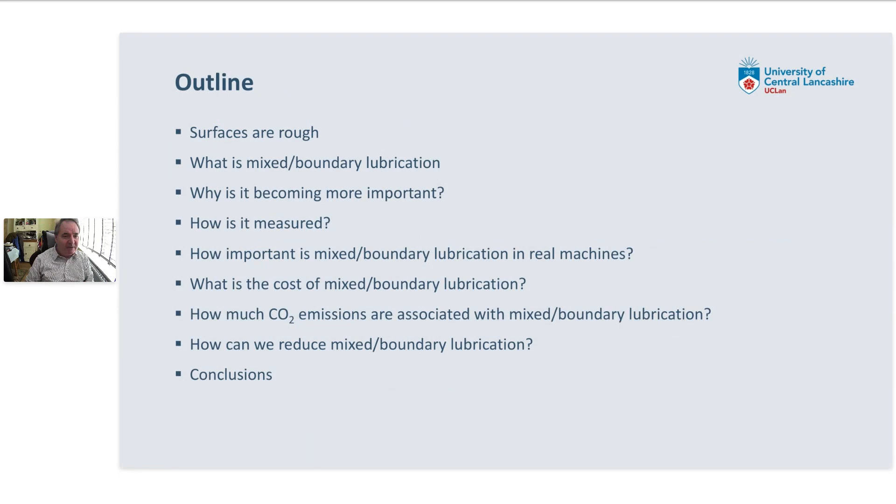I'll explain why mixed and boundary lubrication is becoming more important, and then I'll talk about how mixed and boundary lubrication can be measured in the laboratory and how it can also be measured in real machines. Then I will talk about how much mixed boundary lubrication actually costs, and where the costs come from. In addition, I'll talk about how much CO2 emissions are associated with mixed and boundary lubrication. And then I'll talk briefly about how we can reduce mixed and boundary lubrication in the future.

So this is basic tribology, so hopefully many of you on the call will be familiar with this. But at the micron scale, surfaces are rough. So if we have a parabolic slider moving against a flat surface as shown below, if we scale the vertical axis by about a factor of 1,000, we will see that the surfaces aren't smooth.

So the centerline average of the parabolic slider is shown by the dashed black curve. But in fact, the actual surface will oscillate around that centerline average. And depending on how the component has been manufactured, there will be a probability distribution function associated with that roughness.

And you can define a root mean square roughness of the surface, which we call sigma 1 here, and similarly for the flat surface there's a sigma 2. And if we compare the film thickness to the square root of sigma 1 squared plus sigma 2 squared, we can define something called the lambda ratio, which effectively tells you how far apart the rough surfaces are separated.

And you need a lambda value of about 3 or more to completely separate the rough surfaces. And if the lambda value is less than that, then you will start getting the rough surfaces interfering with each other and touching each other, and you'll get wear and friction occurring.

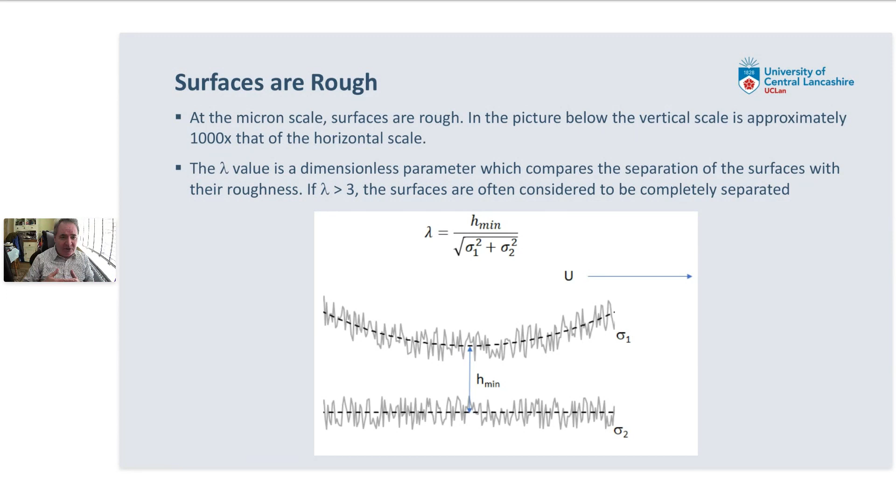So what this means is if we measure the friction coefficient, it will depend to a great extent on how thick the film is between the moving surfaces. The figure below shows what happens as we change the lambda ratio when two surfaces are sliding against each other.

When lambda is less than 1, effectively none of the load is carried by the fluid. All of the load is carried by the rough surfaces, and you end up with a friction coefficient which tends to be a fixed value of about between 0.1 and 0.2 typically.

Then as the lambda ratio increases, as we increase the film thickness, we'll start getting some of the load carried by the fluid and some by the asperities. Because some of the load is carried by the fluid, the friction coefficient drops from its value in the boundary regime, and it will drop and drop until the amount carried by the fluid is 100% and there's none carried by the asperities.

So on the right hand side of this figure, the fluid is thick enough to completely separate the rough surfaces, and the friction is entirely determined by the properties of the fluid, things like viscosity. If we carry on increasing lambda, making the film thicker and thicker, the friction actually goes up because you've got to overcome all the friction of carrying this big thick fluid film.

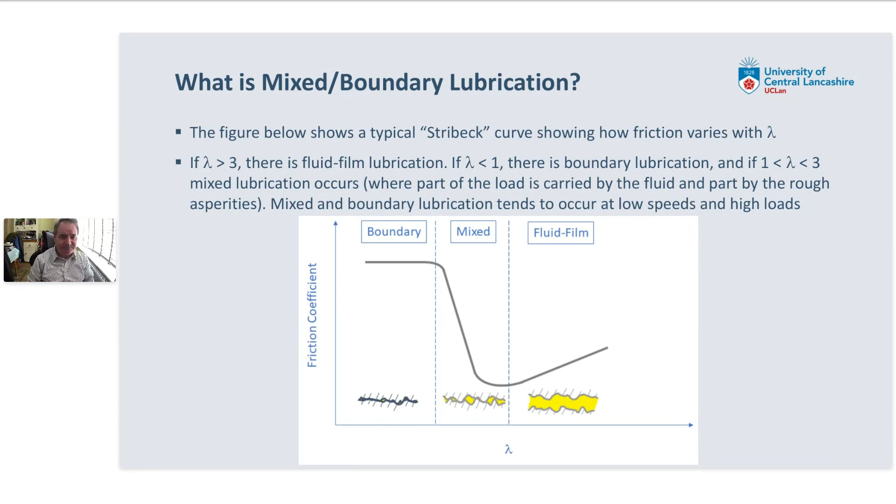One reason why mixed and boundary lubrication is becoming more important is because there's an increase in interest in making machines more efficient. And one way of doing that is to use lower viscosity lubricants.

This table shows how the viscosity of passenger car lubricants has changed since about 1990. Back then, a lot of people were using SAE 15W40 grades in their engines, with viscosities as shown: about 114 centistokes at 40 degrees C, about 15 centistokes at 100 degrees C, and a high temperature, high shear viscosity, measured at 150 degrees C and a shear rate of 10 to the 6, of about 3.5. That was the situation in 1990.

If we go to the present day, a lot of people are using 0W20 grade lubricants in their cars nowadays, and the viscosity has effectively halved at 40 degrees centigrade, has come down by about a third at 100 degrees centigrade, and has come down substantially at the high temperature, high shear viscosity.

The reason people have been using lower viscosity lubricants is because engines are primarily lubricated hydrodynamically. So if we reduce the viscosity of the fluid, we should reduce the friction in the engine and improve the fuel consumption. And that indeed is the case.

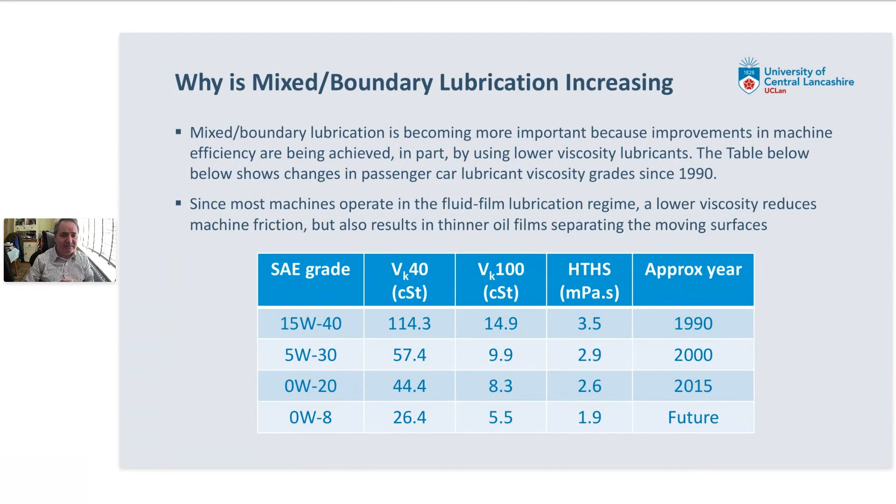So how can we measure mixed and boundary friction in the laboratory? We typically use tribometers of various types. An example shown here is a mini traction machine.

This is effectively like a pin on disc machine, but instead of a pin, it uses a ball, and the ball can rotate or be fixed to slide. This machine is filled with oil, and we're measuring the friction between the ball and the disc.

The reason there's quite a lot of interest in this machine is that the disc speed can vary from just a few millimeters per second to a few thousand millimeters per second. So the wide range of disc speed means you can go from boundary friction right through mixed friction almost to hydrodynamic, depending on the temperature of the oil.

What we can do is change the ball and the disc for each test. The disc and ball are usually quite smooth, with surface roughness of about a few nanometers, 5 nanometers for the typical samples used here. And we can simply test different lubricants to see what the effect of changing the lubricant is on the friction coefficient.

And so we've got some typical results shown here for a 10W40 engine lubricant. This lubricant is the blue line in this graph. This particular lubricant will have quite a lot of anti-wear additive in, and that tends to give you quite a high friction coefficient of about 0.12, and it stays high up until about 100 or 200 millimeters per second.

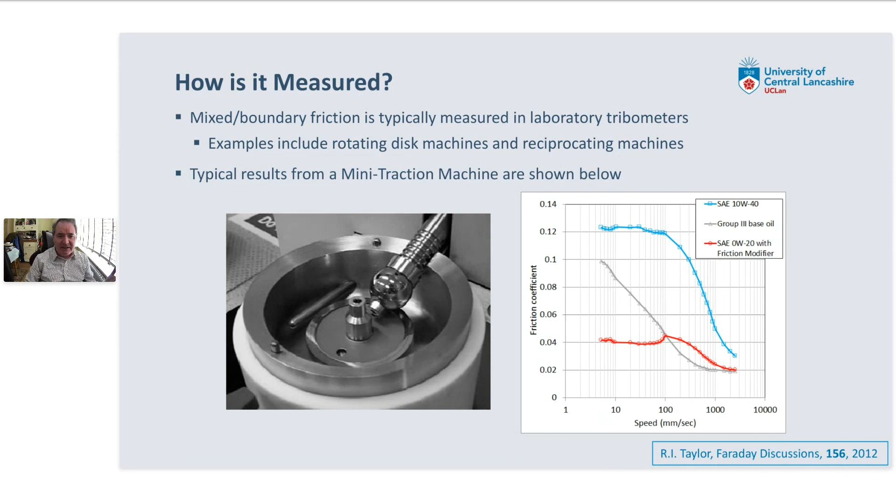And then the mixed regime doesn't seem quite as important because it's squished on this graph due to the nonlinear logarithmic scale that we used.

So as tribologists, we do need to consider how results are presented and what perception those results give you by looking at the different ways they're presented. Although it's useful to plot on a logarithmic scale because you can get the wide speed range on that scale, it does sometimes give you the impression boundary friction is much more important than it actually is.

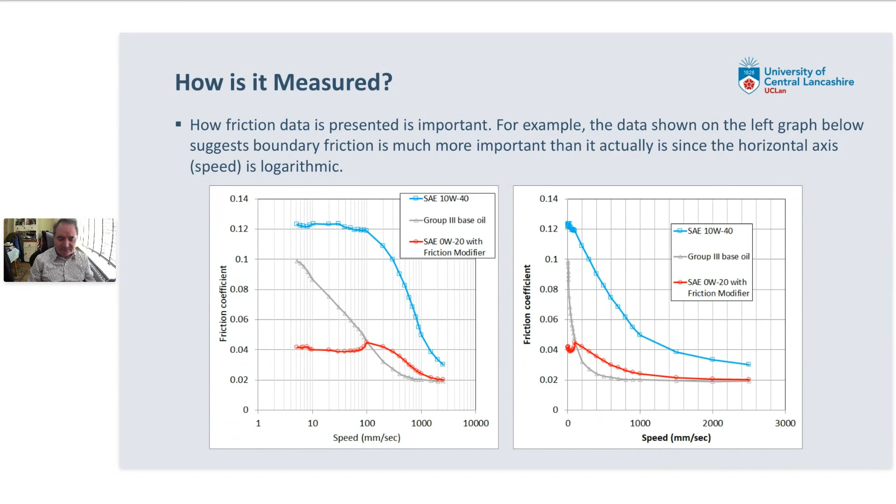Now, the mini traction machine has also been used recently by the Imperial College tribology group, and they did some interesting experiments where they tested a wide range of lubricants in the mini traction machine, and they subtracted the fluid film friction, and they normalized the data so that the boundary friction was normalized to 1. Crucially, they plotted the data not against speed, as is usually done in the mini traction machine, but against the lambda ratio.

And they actually found that you could find a common curve for a lot of the lubricants that were tested. I should say none of these lubricants had friction modifiers in, but this work suggested that you could come up with fairly simple equations to predict the proportion of mixed and boundary friction, which in this case we called X, as a function of the lambda ratio.

In fact, some work I did with co-workers at the University of Central Lancashire, we compared this fit to commonly used mixed and boundary friction models, things such as the Greenwood Tripp model. We actually found that the Greenwood and Tripp model under-predicted the mixed and boundary friction proportion compared to the experimental data from Imperial College and this curve fit.

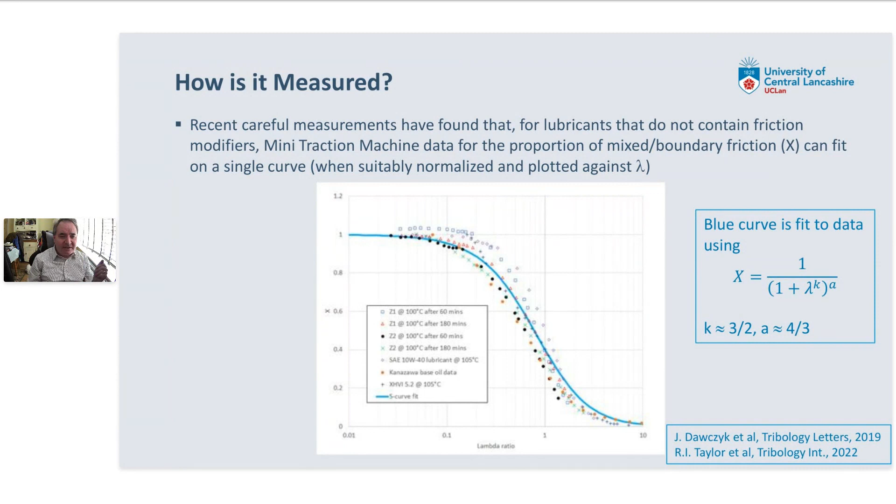So this is all measuring mixed and boundary friction in the lab. What about in real machines? This is some data from passenger car engines. For passenger cars, there are lots of groups around the world that have directly measured the friction loss of engines.

Typical data is shown on the left-hand curve, where this is a motored test. So the engine is not firing as it usually does. You're simply running the engine via an electric motor and measuring the friction loss of the bearings and the piston and the valve train.

What you tend to find is the friction goes up with engine speed, and for speeds greater than about 1500 RPM, the friction simply goes up with speed. When friction goes up with speed, that's usually an indication you're in the hydrodynamic or fluid film lubrication regime. But if the speed is less than about 1000 RPM in this particular case, we see the friction starts to go up again at low speeds.

This is an example where you've got mixed and boundary friction. In the reference quoted here, the friction of this engine was split between fluid film components and the mixed and boundary components. We can see that mixed and boundary friction actually becomes greater than fluid film friction for speeds less than about 1200 RPM. This was with a fairly old 1990s 2-litre gasoline engine, fully warmed up, with a sump temperature of about 93 degrees centigrade. So we can see a considerable amount of mixed and boundary friction at low speed in this engine.

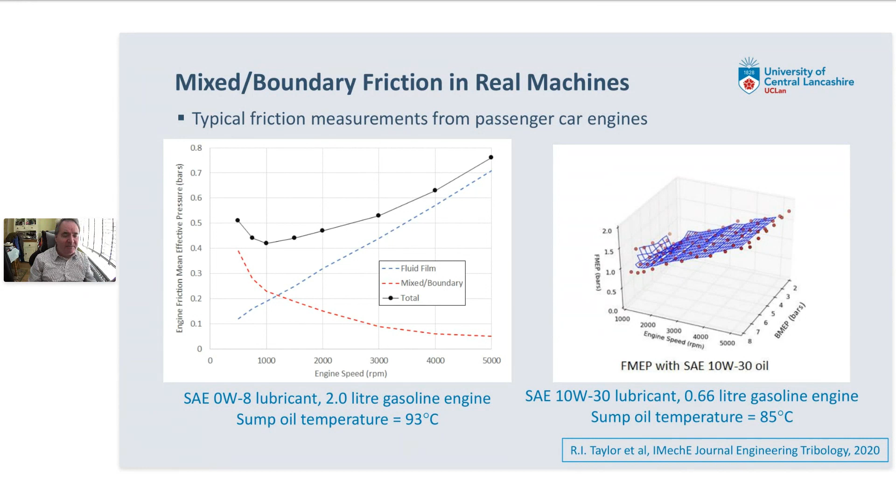Now, this simple graph hides the fact that each component really has its own Stribeck curve. This is the same data plotted again, but in terms of the different component contributions. The blue line shows how the valve train friction varies with speed, and it keeps going down with speed - so over the whole speed range of this test, the valve train is in the mixed and boundary friction regime. Contrast that with the red line, the journal bearings, where friction simply goes up with speed over the whole range, suggesting the bearings are completely in the hydrodynamic fluid film regime. Then you've got the piston assembly, the green line, predominantly in fluid film lubrication above about 1000 RPM, but at lower speeds we see some mixed and boundary friction too. The timing chain is a bit complicated, but it's a fairly small contributor to engine friction.

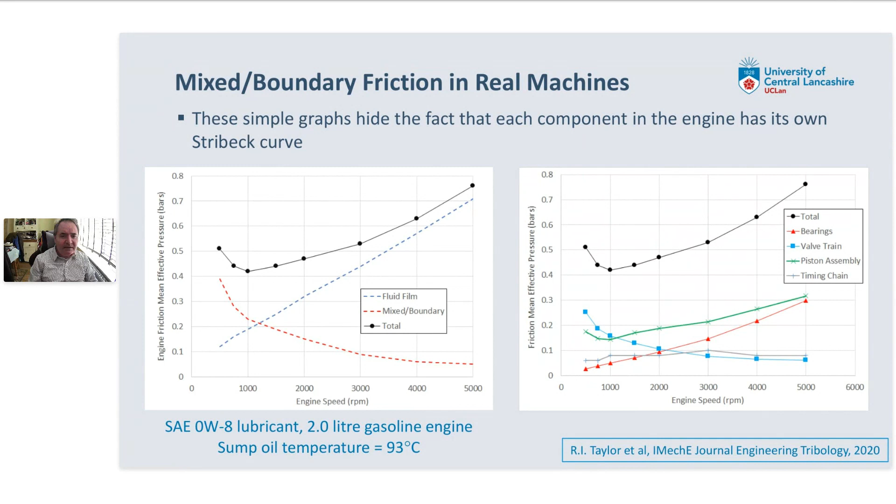The other thing about real machines is a process called running in, which is quite important for friction. When you've got two brand new components, the rough surfaces, when they first touch, the highest asperities will tend to contact first. They will plastically deform, and you'll get wear occurring. Over the next tens or hundreds of hours, the surfaces will actually modify themselves, and you'll usually find that the surface roughness of the new component is reduced after running in occurs, and that the friction of the new machine or engine will be higher than when it's fully run in.

This graph shows some data from a paper from 1996, where they directly measured the friction force in a piston assembly for a brand new piston ring and a run-in piston ring. We can see that for the new piston ring, there are quite large spikes occurring when the piston speed is 0. But once it's run in, there's substantially less mixed and boundary friction because of the lower surface roughness.

Also the component can actually change shape - this occurs for piston rings. The shape can change, which can subtly alter the film thickness in the piston ring and actually give you thicker films. So you can end up with a worn ring giving you thicker films and having lower roughness, so you get a double effect on the lambda ratio. For a new piston ring, the lambda ratio could be maybe 1, but after it's run in, it could be 3 or 4 - so you can move from mixed and boundary through to fluid film.

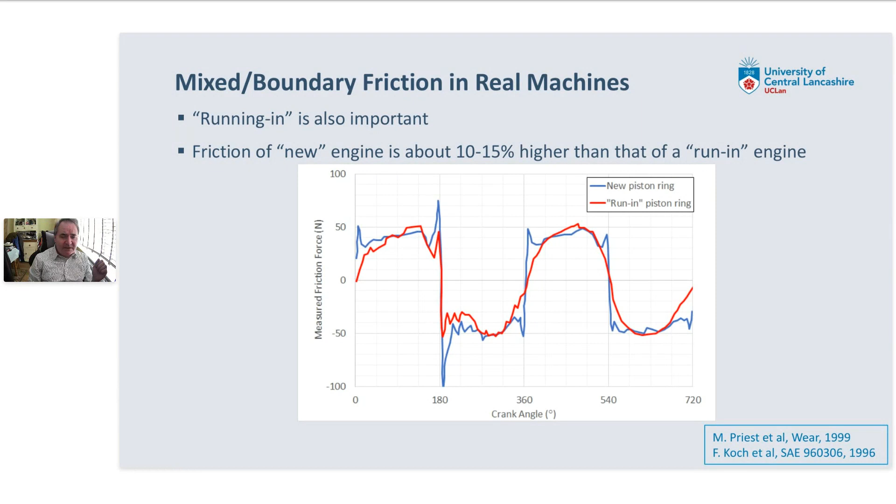So that's showing what happens in real machines. Now, what about the costs of mixed and boundary friction? There are really 3 components to how much mixed and boundary friction will cost someone. First of all, you've got friction occurring, and you have to supply fuel or energy to overcome that friction. So part of the cost is simply the energy used - the price you pay for the fuel that is used to overcome mixed and boundary friction.

Secondly, mixed and boundary friction can cause wear, so you can end up with parts wearing out and needing replacement. You'll have to take the part out and put a new one in, with the cost of making the new part, getting it to where it's needed, and fitting it. Thirdly, in some situations in factories, a key machine could fail, and the whole factory has to close down. You're still paying workers, and there are lots of costs associated with unexpected breakdowns. So that's the main areas where costs occur.

Now, in terms of passenger cars, under fuel economy tests, a lot of work has gone into trying to work out how much fuel is used to overcome engine friction. Typically, because fuel economy tests are done under low load, roughly 20% of the fuel used in the vehicle is used to overcome engine friction.

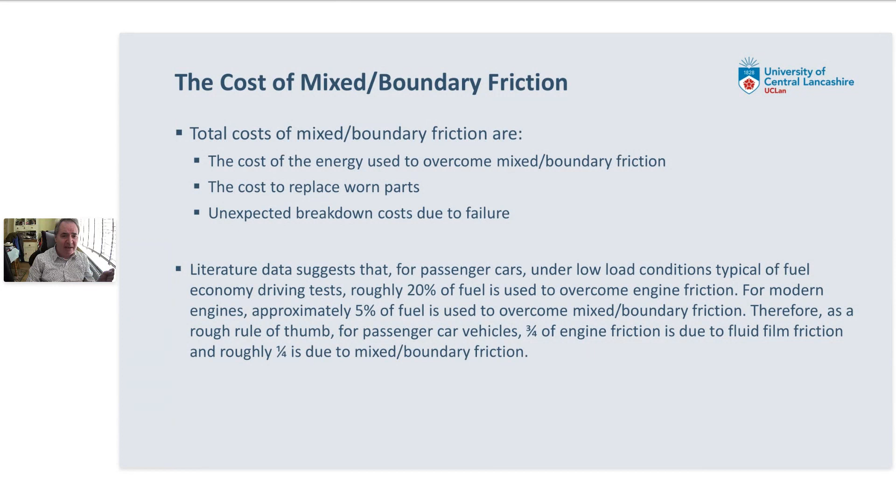In a typical car used in the UK, people will typically use 1,000 litres of fuel a year. So if 5% of that is used to overcome mixed and boundary friction, that's about 50 litres of fuel per year per car. In the UK, there's about 30 million passenger cars, so we can multiply these numbers up and end up with quite large figures. Just for the UK, there's about 1.5 billion litres of fuel used to overcome mixed and boundary friction, and that costs, at about £1.50 a litre.

In addition, there's the cost of making the fuel and the CO2 emissions associated with burning and making it, about 3 kilograms of CO2 emitted for each litre burnt. So we can work out the numbers for the UK and extrapolate to the worldwide car population. In the UK there's 30 million cars, worldwide there's about a billion cars. If we multiply these numbers up worldwide, about 50 billion litres of fuel are used to overcome mixed and boundary friction, at a cost of about $100 billion, with CO2 emissions of about 155 million tonnes. These are large figures.

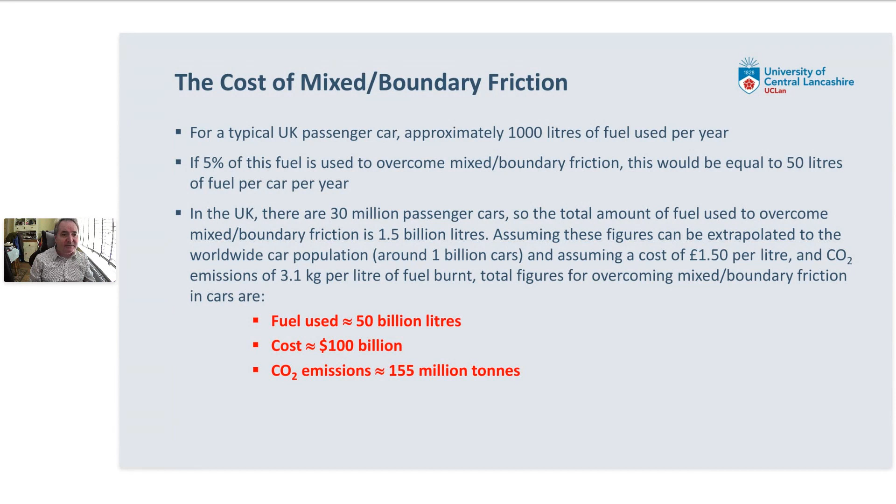This is because as you scale an engine up from, say, a small 1-litre gasoline engine to a 10-litre diesel engine, the hydrodynamic parts become more important compared to the valve train, which is mainly the component with most mixed and boundary friction. In addition, if you scale the valve train up, it actually becomes easier to lubricate, and with a larger engine you have space to put rolling elements into the valve train, whereas in a small gasoline engine it's usually sliding elements.

So what happens in a large diesel engine is it's much more hydrodynamic than a small gasoline engine. At the same time, heavy-duty diesel engines are used in trucks which are quite heavily loaded, and when a vehicle is heavily loaded, the proportion of fuel used to overcome friction decreases. So you've got two effects happening in a heavy-duty truck: less fuel is needed to overcome friction. Whereas in a gasoline engine we said 20% of fuel was needed to overcome engine friction, in a heavy-duty truck it's more like 10%.

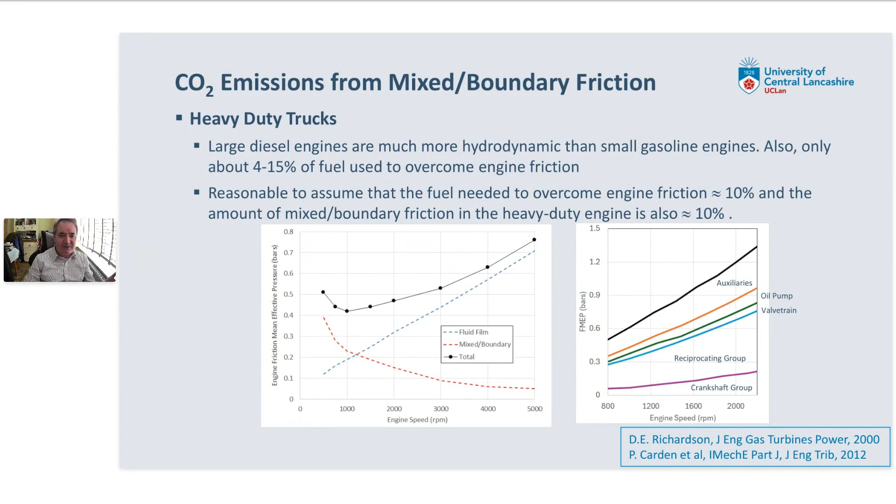So although only 1% of fuel is needed to overcome mixed and boundary friction in a heavy-duty truck, this is counterbalanced by the fact that fuel consumption of heavy-duty trucks is much larger than passenger cars. There are two effects going on: first, the fuel consumption of the truck is a lot larger, about 30 litres per 100 kilometres compared to 6 or 7 for a passenger car. Secondly, the annual mileage of a truck is about 10 times larger than that of a car.

For a typical truck, the annual fuel consumption is about 30,000 litres compared to 1,000 litres for passenger cars. When we combine all these figures, we find that roughly 300 litres of fuel per year is used to overcome mixed and boundary friction, at a cost of about £450 and CO2 emissions of almost 1,000 kilograms. Worldwide, there are about 300 million heavy-duty trucks. When you do the sums, the figure for a heavy-duty truck for overcoming mixed and boundary friction, in terms of fuel, finance, and CO2 emissions, is actually higher than the numbers coming from passenger cars, even though the amount of mixed and boundary friction is actually lower in the heavy-duty truck.

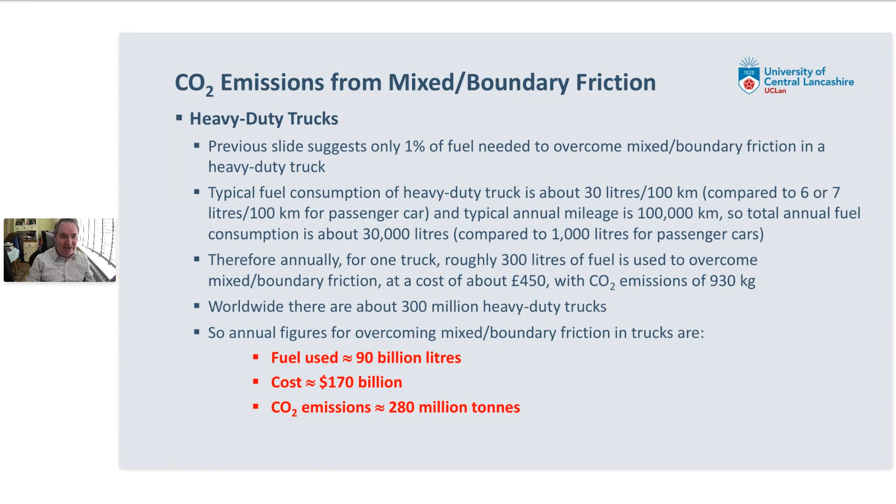We've seen there are some very large numbers here on how much fuel is used to overcome mixed and boundary friction, what that means financially, and how much CO2 emissions there are. So there's a lot of interest in the tribology community in how to reduce mixed and boundary friction, and there are really three main approaches. First, we could try and reduce the friction coefficient between the moving surfaces.

We can use friction modifier additives in lubricants. We could look at using alternative materials, such as ceramics and DLC. And there's a lot of research going on in tribology labs looking at super lubricity - can we make changes to the surfaces so that you almost get an order of magnitude reduction in friction coefficient by making the surfaces super lubricious?

The second thing you can do is try and alter the surface roughness profile. You could super finish components and reduce the surface roughness, but this obviously adds expense to the finished component. The other thing you could do is put deliberate surface texturing onto components to increase the load-bearing capacity of the surfaces and actually increase the film thickness.

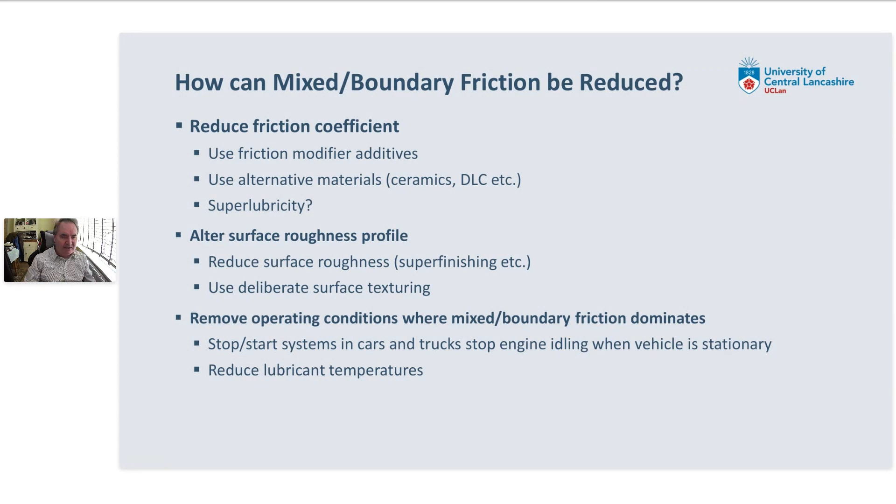The third thing you could do is try and reduce the operating conditions where mixed and boundary friction dominates. For example, in cars and trucks, you get most mixed and boundary friction occurring when the engine idles. So if you have a stop-start system where the engine stops when the vehicle is stationary, you effectively remove those operating conditions and reduce the amount of mixed and boundary friction. The other thing you could do is reduce lubricant temperatures, which will increase the viscosity of the fluid and increase the film thickness.

I've just about finished, hopefully just about on time. Hopefully I've convinced you that mixed and boundary friction is becoming more important because lubricant viscosity is going down. In addition, power densities of machines are going up, lubricant temperatures tend to be increasing, and sump volumes are decreasing.

We've done some detailed calculations for passenger cars and trucks and found that for passenger cars, about 5% of the total fuel used, and 1% of the total fuel used in a heavy-duty truck, are used to overcome mixed and boundary friction. These costs - just the energy costs, I've not talked about the cost due to wear or replacement parts - amount to enormous figures. For passenger cars and heavy-duty trucks, we've estimated about 150 billion litres of fuel are used to overcome mixed and boundary friction, at a cost approaching $300 billion, with CO2 emissions of almost 500 million tonnes.

These are very, very large figures, and it focuses the mind of the tribology community that the need to reduce mixed and boundary friction, as well as being good in terms of reducing friction and making machines more energy efficient, will have a massive impact on the amount of fuel used, cost to the customer, and CO2 emissions. Research on reducing mixed and boundary friction, including topics such as super lubricity, are going to be very important in the future for both customers and the environment.

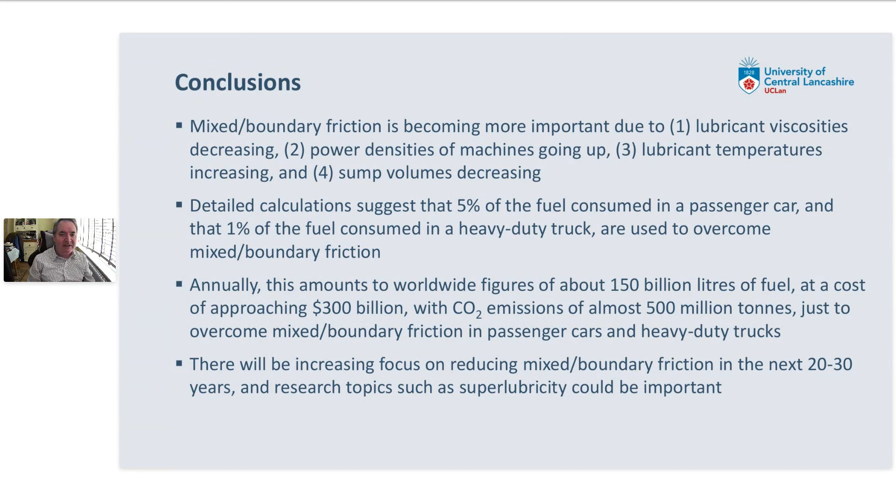So thank you for listening, and I'm happy to answer any questions, which I think will be after Ben's talk. So thank you very much.

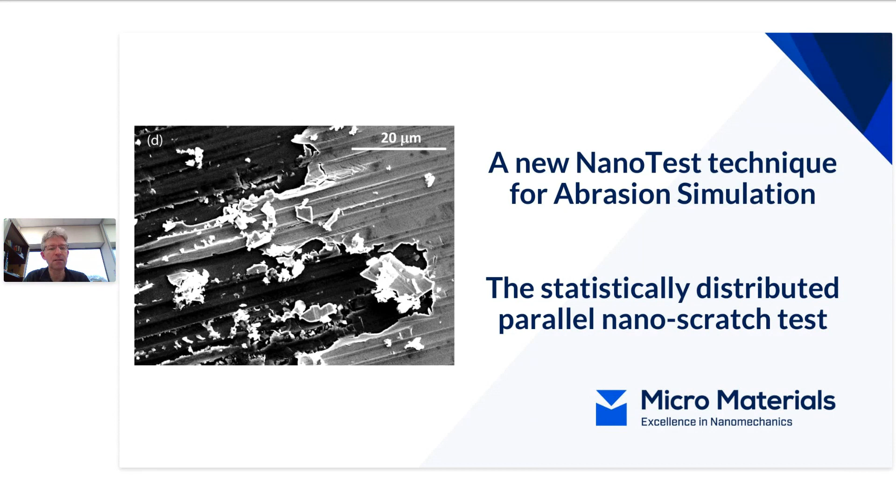We've developed a new test technique for our nanotest system to simulate the abrasive contact more effectively than having just random repetitive scratches in the same place. So what we're doing here is controlling, putting scratches on a surface with controlled distribution, and that allows us to simulate abrasion more accurately.

The tests are carried out within our Nanotest Vantage, which is a multifunctional nanomechanical test platform. It has the capability to do indentation, scratch, wear, impact, reciprocating tests, things like that, at nano and micro scales, also in different environments, hot and cold, and in different liquids or humidities. We can combine our tribo testing capability with multi-sensing through monitoring things like acoustic emission or contact resistance, as well as measuring the friction and the depth in the tests.

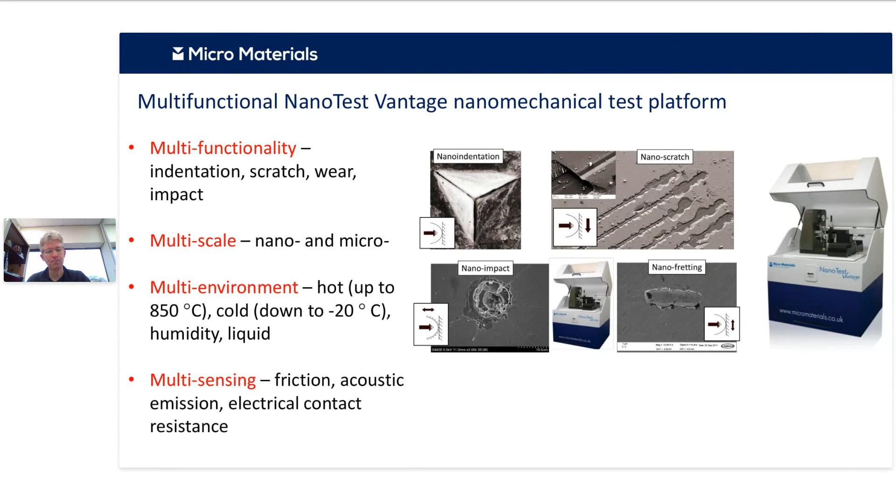You've just heard about how we want to minimize friction in sliding elements, and we want to minimize friction through abrasive wear. So abrasive contacts - these are just pulled off the internet essentially - clearly cause surface damage, and it's one of the most common general wear mechanisms, if not the most common general wear mechanism.

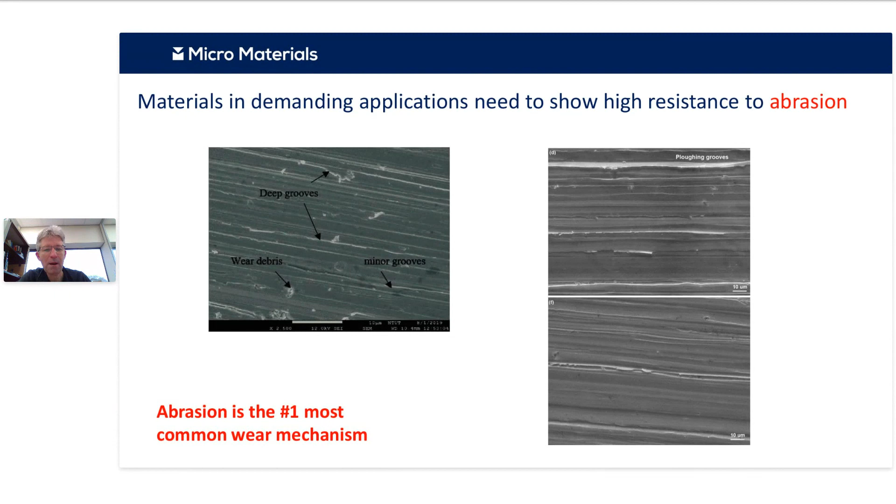So what we've done with our nano scratch test is we've added some additional capability to allow us to produce these multi-pass scratch tests, where between each pass we move the position with a semi-random but computer-generated statistical distribution of start points. These distributions can be normal around a surface position, or they can be so-called rectangular distributions where there's equal probability of starting anywhere. We can change these region widths, change the loads, and change the number of scratches.

So why this is important essentially is, John Williams showed years and years ago, that if you're scratching a perfectly smooth sample, you typically get ploughing or something like that. But when you've got some surface roughness, then you get transition to more severe wear modes like cutting and abrasion. So what's happening is the damage from one scratch, or the pile up even from one scratch, is affecting the next scratch nearby, and this is leading to transitions in mechanism.

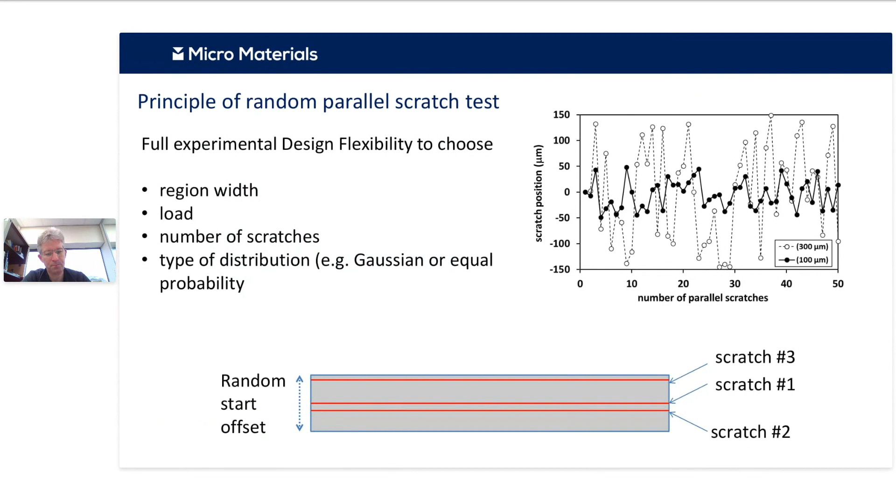Here's a simple example. This is for optical coatings produced on a transparent substrate, where there was a problem in the coating deposition where the plasma pre-cleaning wasn't working effectively. You can see clearly there's a big adhesion problem, and the statistically distributed scratch test has picked that up quite nicely. You're getting complete removal of these areas in the test, which is a much more effective way of doing this than a standard nano scratch test.

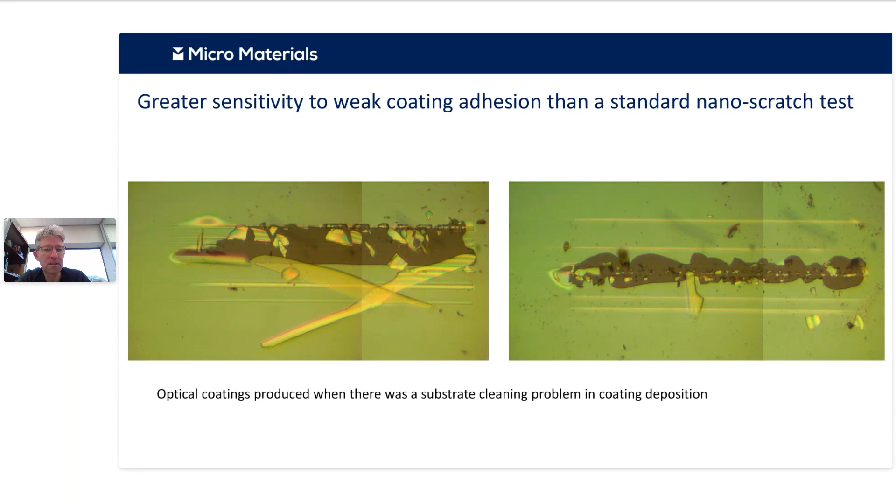Here's another example, in this case for a nuclear application, a collaboration with the University of Huddersfield. What we're seeing here are two different high entropy alloy coatings that are very mechanically similar, being tested under the same conditions. But you can see that the one on the left is much more brittle than the one on the right, so the one on the right is clearly a much more abrasively resistant coating.

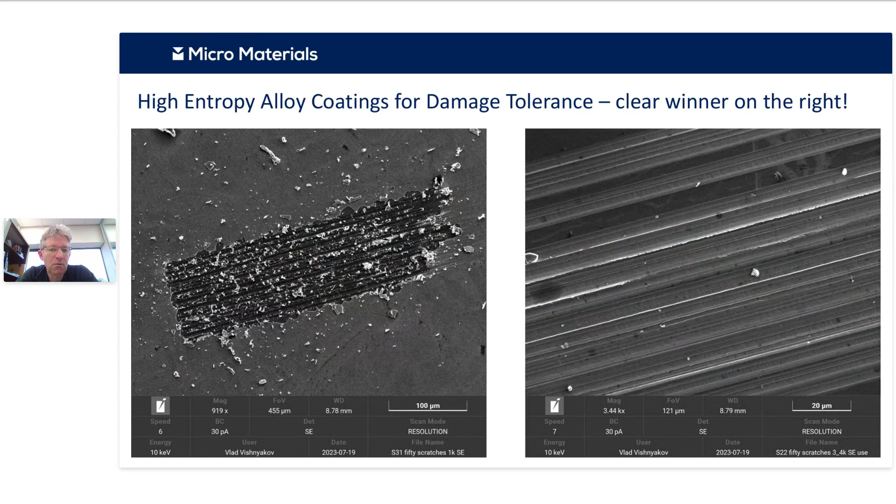So that's all pictures of the surface, but actually what we can do is track the deformations cycle by cycle within the test. We can track the deformation along the entire track, look at mean values on those tracks, and see how those mean values change as a function of cycles.

In this case, up to about 20 cycles, the surface is essentially quite resistant to failure, but somewhere around 20-25 cycles you get a transition to a more abrupt damage regime. This is just the depth signal, but you've also got friction or other signals at the same time, so correlating them is useful, allowing you to look at transitions between third body abrasive wear situations, and see where you're getting transient rolling contacts as well as pure sliding contacts.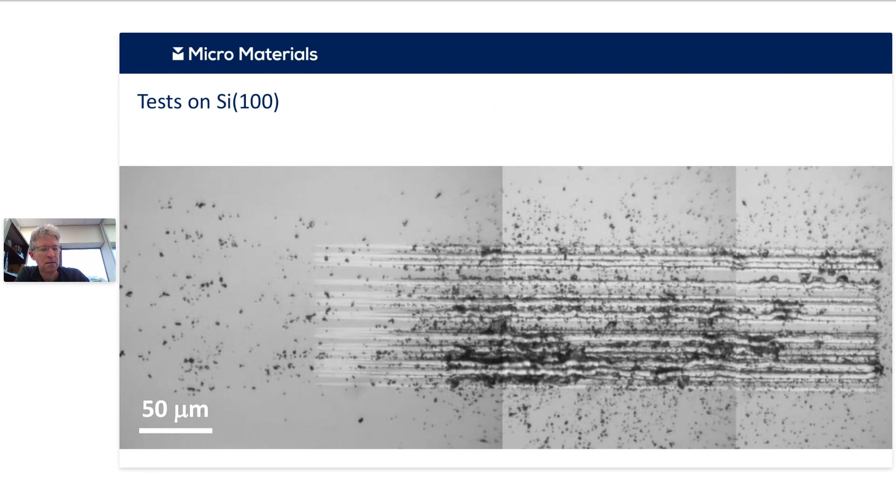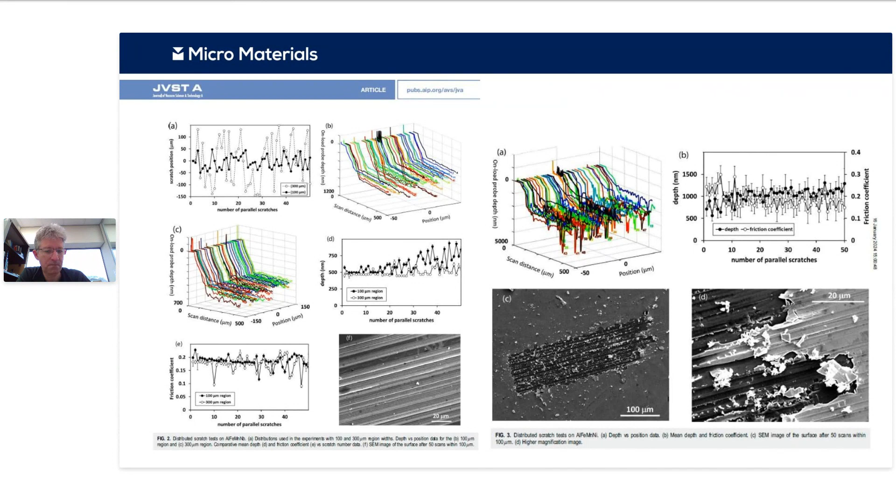We have recently published on these high entropy alloys - there's a paper out now, free to download in that journal, so you're welcome to search for that. There's some pretty pictures from that paper. One thing I didn't show is these angled plots, which illustrate where the damage is occurring, so you know exactly which is which, and can track what causes the transitions to more severe mechanisms.

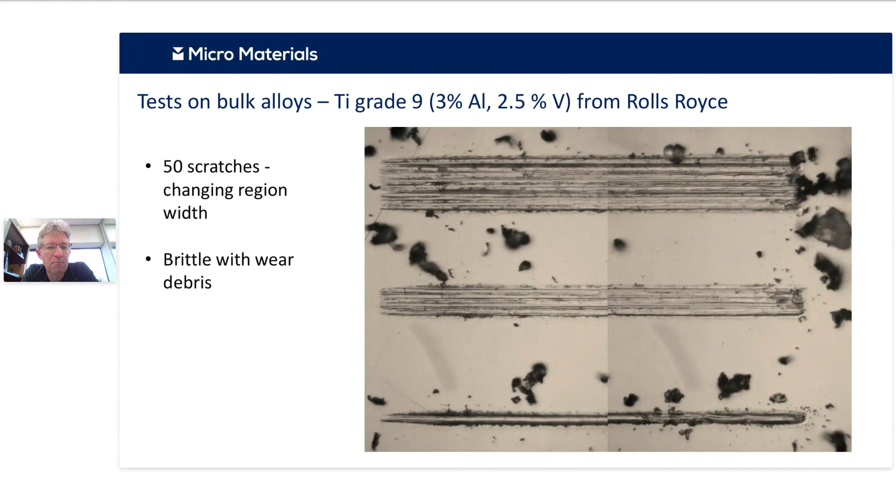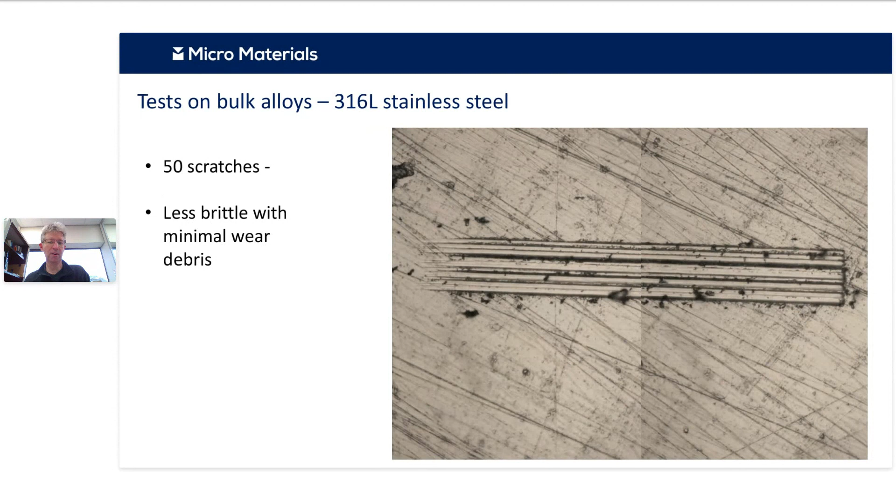If we look in contrast under pretty similar conditions, on a more ductile material, we're getting a much cleaner response, and you're just starting maybe to get a transition towards brittle chipping under the same conditions. So this is quite a useful way to test the abrasion resistance of new materials you're developing.

Okay, so hopefully that was of interest. I showed some data, all at room temperature - we're downstairs in the lab at the moment doing similar tests for a project sponsored by the UK Space Agency, including high temperature abrasion tests as well. This is really starting to help our fundamental understanding of the mechanisms in abrasive wear, and we think we have a unique tool to design more damage tolerant materials. It's equally applicable to coatings and bulk materials, and exists in the current version of the nanotest scratch module. Okay, thanks very much.

Back to Sam if he's coming back. Yes, there he goes. Yeah. There you go. Thank you very much, it was a great presentation. It was nice seeing new features for the nanotest platform.